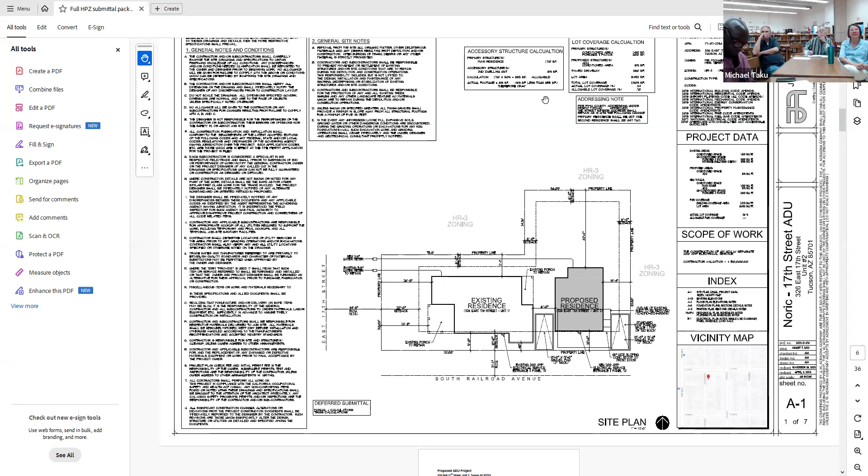Okay, can you all see that? Yes. So basically what we have here is a pretty typical residence in this area. The original house is a 1907 single-story residential house. It always has been and still is. For the most part, it is original in all of its materials other than standard upkeep and maintenance.

That's happened over the years, with the exception of a small dining room addition done off the southwest corner of the property back in 2003. The reason I make note of that is the aesthetic of that addition is really what drove the aesthetic for the ADU.

One, because I think it marries up nicely with the historical fabric of the main house without detracting from it, and trying to abide by the federal Department of Interior historical aesthetic requirements to enhance and be historical, but not match it exactly. So that's kind of where we were going with that.

The proposed ADU is 800 and something square feet, 2 bedroom, 1 bath, little house. Meets all of the zoning criteria under the HR-3 zoning in terms of setback and height and coverage and everything. We're not asking for anything unusual there.

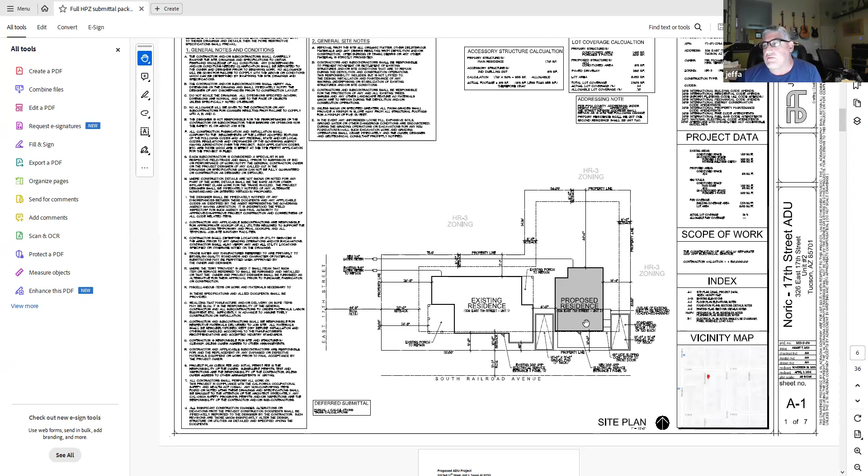And I can go through the photos and show you what I'm talking about right here.

Zoom in. That's too much. You can kind of see them right here, but that's the addition.

In fact, the main thing that was pushing it was the owners tried to renew their insurance policy, and they were questioning whether the structure was even covered. When they found out and saw pictures of it, they said they wouldn't even cover it. So that's why we started going down the road of seeing if we couldn't get it removed so it doesn't fall.

I don't think I have any better shots of those sills. That's all neighborhood stuff. So in a nutshell, that's the project. I don't know what things you guys focus on, or other information you might not know about it.

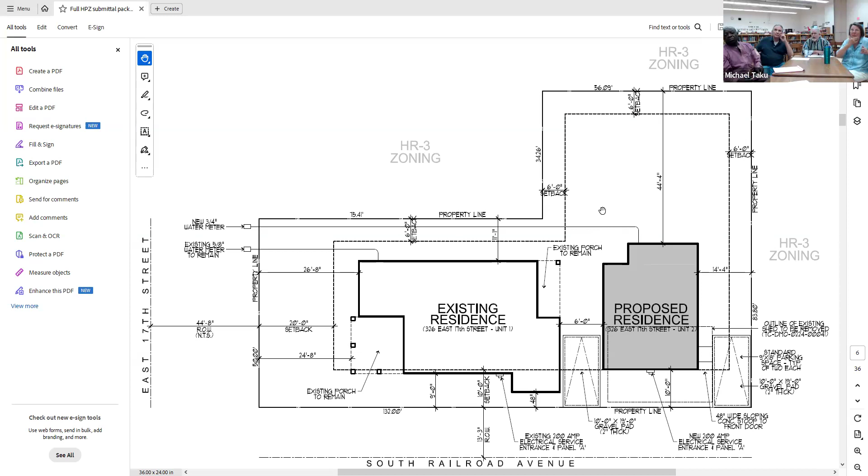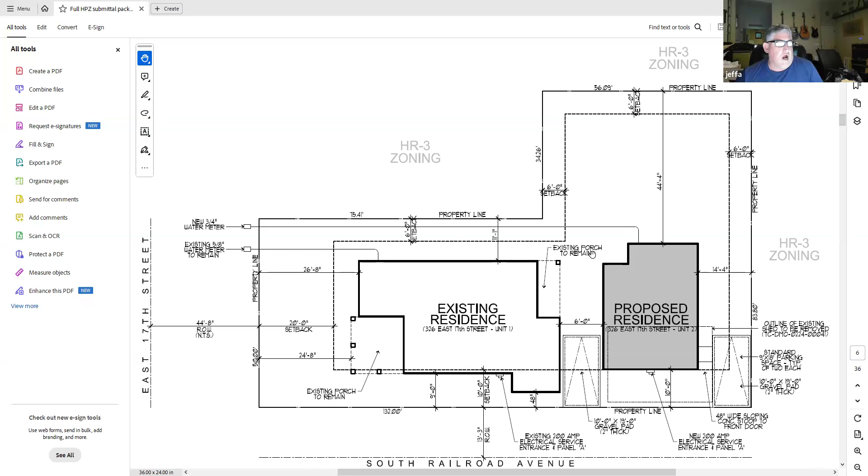And then there are some new fences made out of corrugated metal behind them, between the existing residence and the proposed residence. If you're going to make those parking spaces, what do you anticipate the final fencing for this new reconfigured area to be? Probably wrought iron, similar to what you can see there.

Thank you. Okay, and then I will comment on the windows. You have a lot of horizontal ones and they look like they are 15 inches tall by 30 inches wide. Let me get the elevation. Yeah, you haven't given us those yet, so you might just walk us through. Theoretically our guidelines say you can't have clerestory windows, but I can understand why you would want smaller, higher windows there on the Railroad Avenue face.

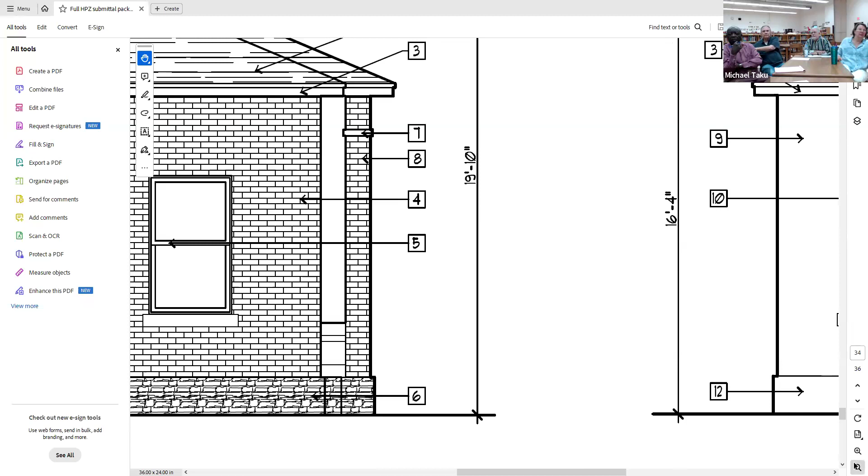And it does differentiate it as a new building. But I just wanted to know what your thinking was, because you have an appropriately scaled vertical window in the eastern bathroom, but not in the northern bathroom or any of the windows on the west face.

The west facing ones, yes, it's a privacy issue first of all, but second of all, we're talking about a relatively small building. If you look at the floor plan, if those windows went all the way vertical, I would virtually have no place to put any furniture in that room. So the idea was to afford some privacy but also give more option in terms of laying out furniture inside the space.

As I said, because you're there on the alley, I can see that we might approve it since this is obviously new construction and isn't the contributing structure on the site. But we will have to call that out as specific to this site and not a precedent for the neighborhood, because it's contrary to our guidelines. Yeah, I get that, okay.

And the same question for the bathroom on the north side - I think it's a 20 by 30 window like the other bathroom - would you consider a more vertical window there? Or is that because it's going to be adjacent to parking as well, in your shower stall? On the north elevation, that's a clerestory window. Would you consider making that a vertical one that matches the bathroom on the east side of the dwelling?

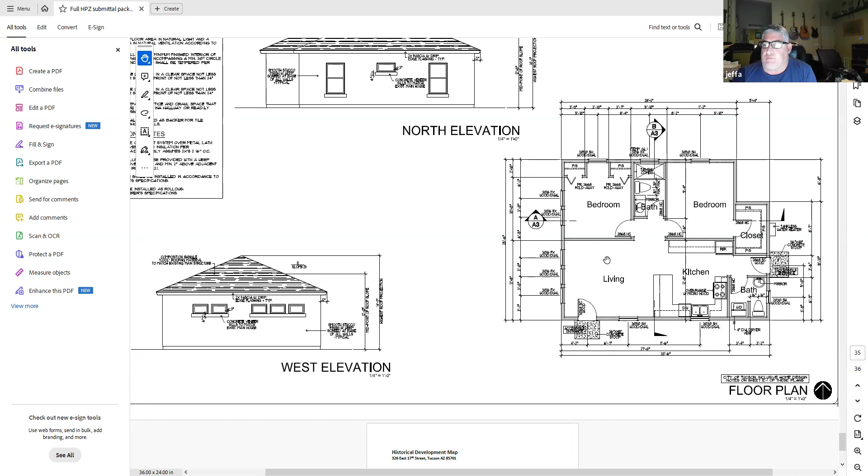It'll be composition shingle, just like the main house. Okay, thank you. We'll probably do a high profile architectural type shingle, but they'll generally match those in the contributing structure. Yes. Okay.

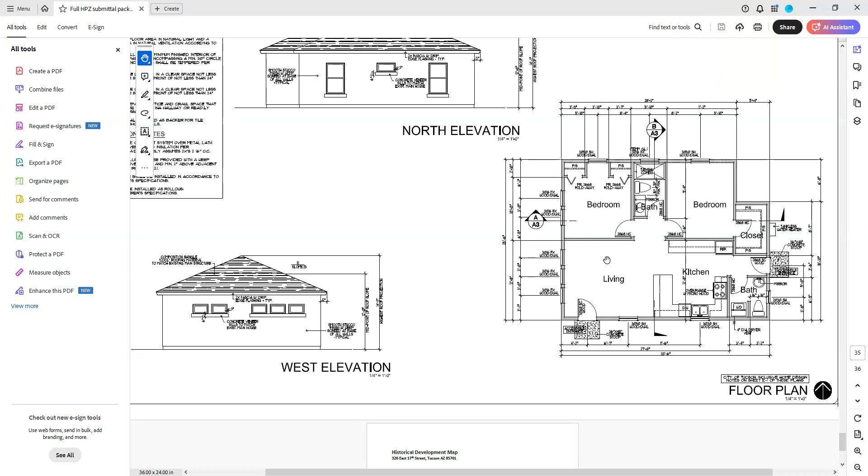My questions mostly have been asked by John, because my concern was the vinyl window proposal. So I think it just needs to be clear on the plans that you will not be using vinyl windows. Yeah, if you look at the callouts on the floor plan, I've already changed them.

But I thought that vinyl thing was original and then that it got changed. You might be looking at an old version. Okay, just double checking that. Otherwise, it looks good to me.

Thank you, and I will interject real quickly here. You do not have a wall height and a base of window height on your plans. You will need to correct those as well. I assume that the wall height is about 8 foot 6 under the eave.

Yeah, I had it at 9 foot and I couldn't get the 12-foot height to work, so we did go down to 8'6". And the windows are all set at 6'8" standard height for the top of them.

Correct. Okay, and there is one clarification: height in the historic district is actually defined as the total height, so your building is actually going to be 14 feet 11 inches tall. The midpoint height is for every other area, but it doesn't apply in the HPZ. But it is smaller than the contributing structure and appropriate in your district, but we need to comment on that.

Okay. Good to know, I learned something tonight. I did not know that. That's fine. We're doing our due diligence. I get you. Great, Pat, comments?

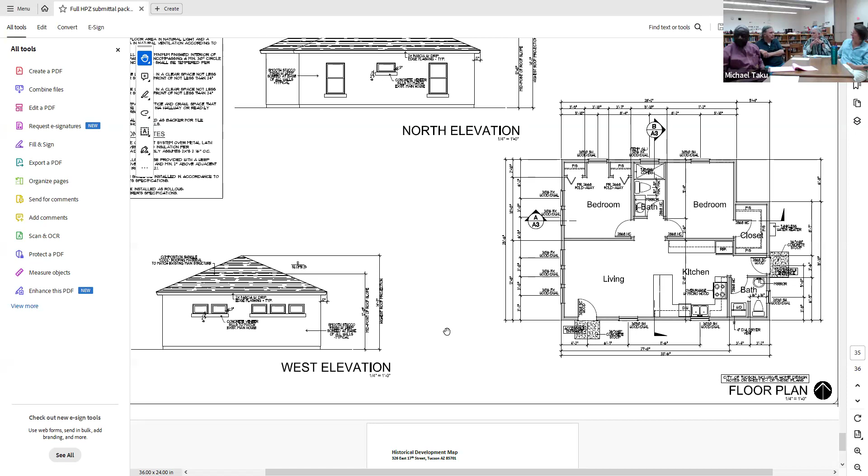Yeah, I can answer that. So it did not come before the board or anybody, because this decision was made by the building official. The code requires that in the historic preservation zone, if a building is contributing or not contributing, the building official can determine that that building is a safety issue and it cannot be allowed to stay, whether it is contributing or not.

If it is determined by the building official that the building has been considered unsafe and a health and safety issue, and recommends demolition, then that demolition takes place. That is why it did not come before the board. Other than that, that particular structure would have come before you for review and recommendation because it was contributing.

And what part of... I have a specific question about that. It's Tucson Code, chapter 16-6, that says that if a building official determines that it can't be done, it also specifies that an architect and an engineer should also look at it, and I don't think that was done in this case.

Well, we have an engineering section in planning and development services that reviews all plans that come for review, and they also determined that the building was beyond salvage. Yep. Okay, all right, great. We just wanted clarity, thank you.

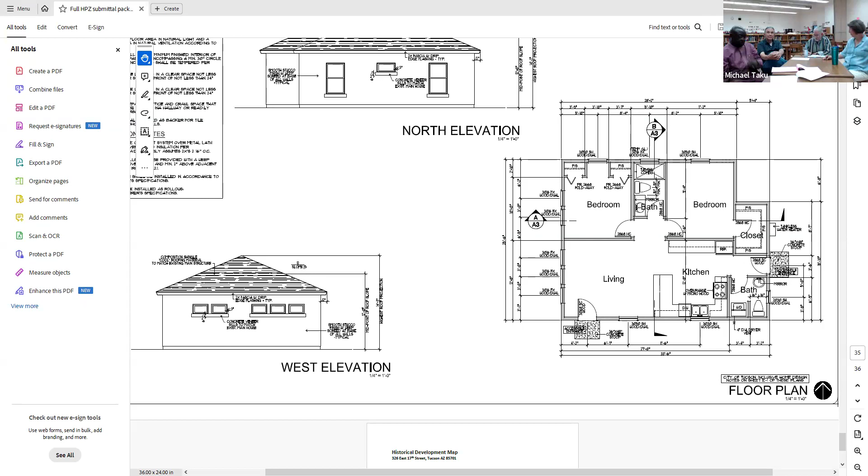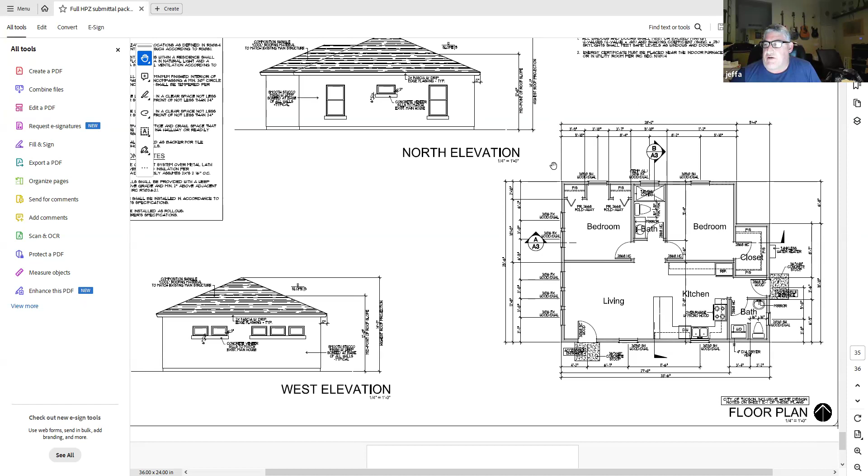Thank you so much, guys. Do you know the next steps, or you can get with Michael? You'll be going on to PRS and you will need to show them this same package, but you will need to go over what we called out that you need to correct. I am assuming there'll be some type of letter document itemizing all these things, so I don't trust my memory. They will be written up in the minutes, and you should at least have the action item that lists all this stuff before it goes to plans review for you. Okay, no problem.